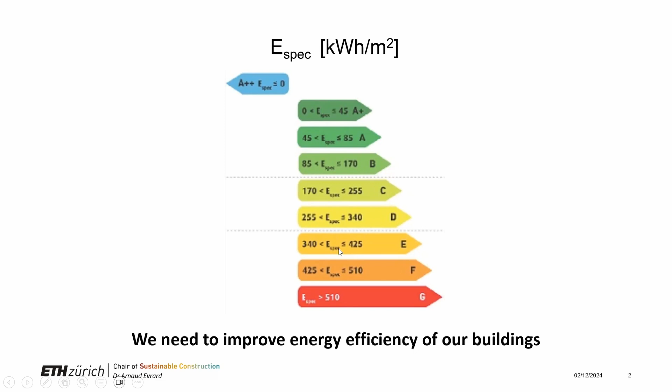Since I started to work maybe 20 or a little more years ago, I always keep on seeing this graphic with the perspective on how we should evolve in terms of carbon emission. This graphic keeps on going up actually, and the scenarios are always hoping that we will get better. Now the aim is to decrease around 50% of our emissions by 2030, maybe to go to zero emission in 2050. It's very, very, very ambitious, but we do have to try.

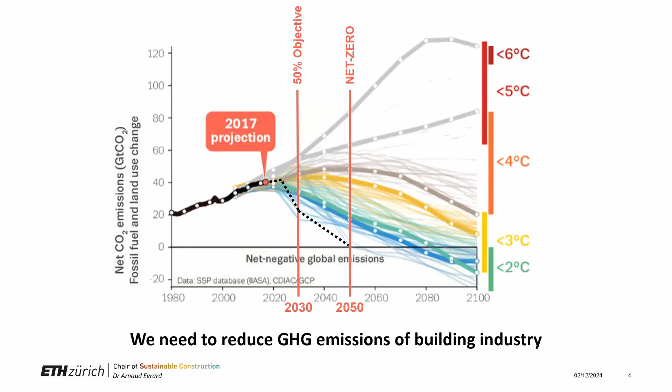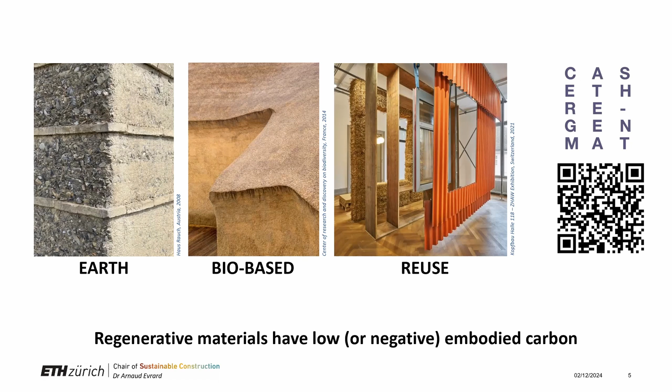I think that's why we should insulate, but we should always insulate with material with low carbon impact. That's why I want to focus here on those materials, and that's exactly this QR code linked to the teaching we're doing in Zurich, where we actually decided to talk about regenerative material, because they're not only good material with very low impact, but they also bring something positive. In this case, with insulation, we basically talk about bio-based material. I'll come back on this.

So to insulate existing buildings, we have many choices. We can put the insulation outside or inside. Sometimes there's space in the wall to fill in with insulation. Sometimes there's a wood structure and the rest has to be renovated, so we can fill the structure with insulation. Basically, we'd say when it's possible, when the aesthetic value is not important, insulating from outside is always better.

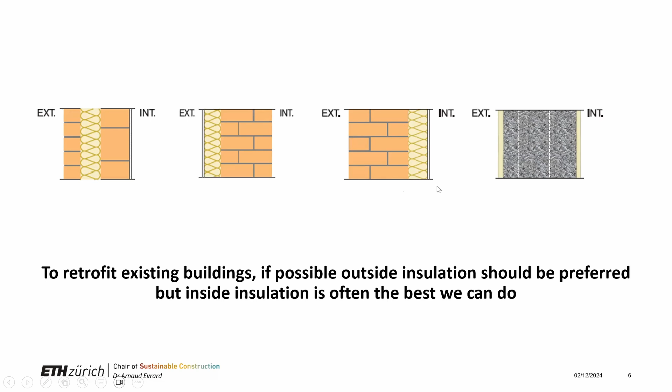But here we discuss focusing on inside insulation. That's what I would do, because actually in many cases that's the only thing we can do, the best we can do. But the problem is that it's not easy, and it makes a lot of building physics problems, or there are challenges in terms of building physics. So I'm basing this on work we did in Belgium, a 4-year research project on inside insulation on brick walls.

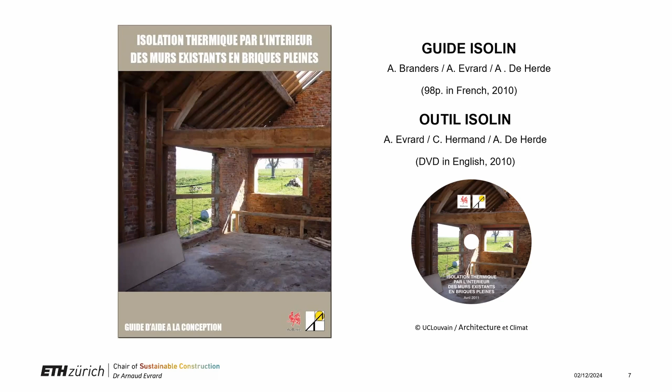I don't want to say I'm talking only about brick wall, but I think all what we did is actually interesting. So I took some graphs and illustrations from there to talk about this.

So inside insulation has a lot of advantages. As I said, you do it from inside, so most of the time it's the only thing possible because you can't put up a scaffold or change the specificities of the outside surface. Usually you don't need a permit, and you can phase the project. So it does have some advantages.

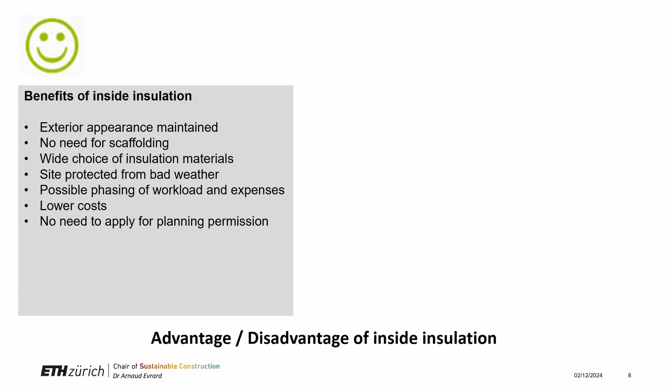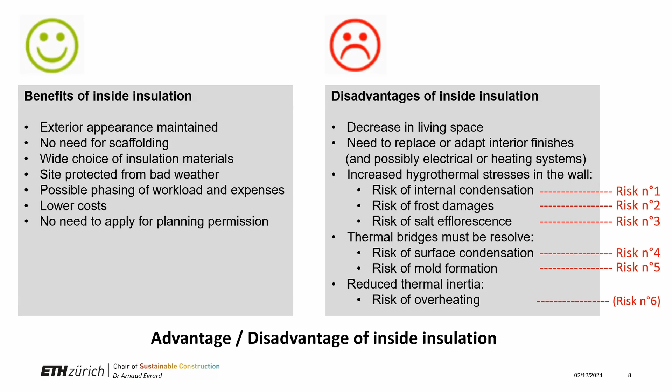But as you can see here, it also has a lot of risks or disadvantages. I will highlight these risks, what I wrote in red here, because I think that's what you should keep in mind when you design an internal insulation system. You have to think about all these problems, and there's quite some complexity, as I will try to show, but it's not impossible, and we do have the material to answer this.

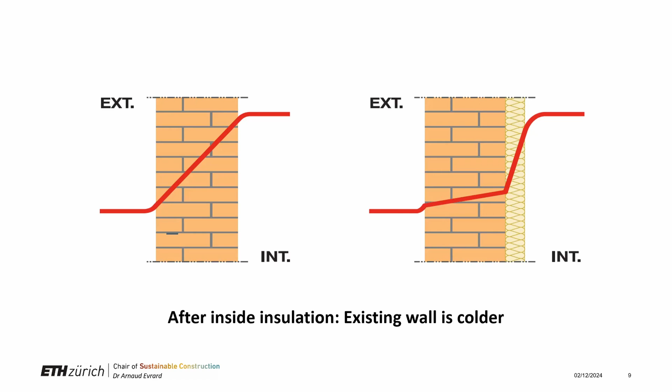So for those who have no idea, just to get the main idea: if you insulate your wall from inside, basically your wall afterwards will be colder. And that's what you should keep in mind, because that's where all the problems or issues are born.

So if you look at this graphic on the amount of humidity the air can hold depending on temperature, the Mollier diagram, you can see that if you have air at, let's say, 20 degrees, 50% humidity, which is an average for inside the ambience, as soon as this air comes in contact with a colder surface around 10 degrees, there will be condensation. It will be saturated, it will condensate.

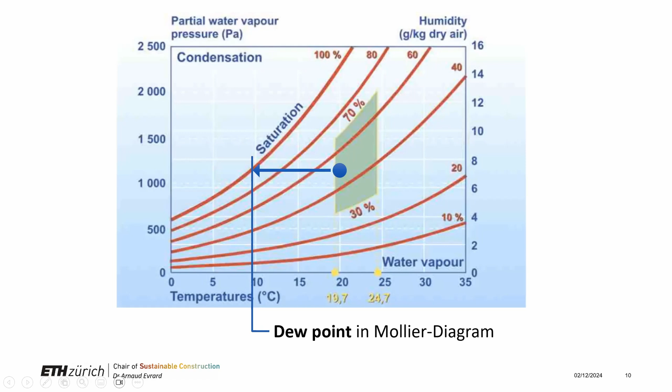This can happen in the wall, on the surface, and of course that's what we try to avoid, or at least try to manage. So the biggest risk is internal condensation.

As I said, you have your inside insulation, and your wall outside is colder. So if the vapor you produce inside, or the higher vapor pressure from inside, has the tendency to go through the insulation, if there's nothing made to break it or slow it down, it will most of the time condensate there, and that's a problem because you will have a source of humidity and you can have many other problems linked to this, with mold or whatever.

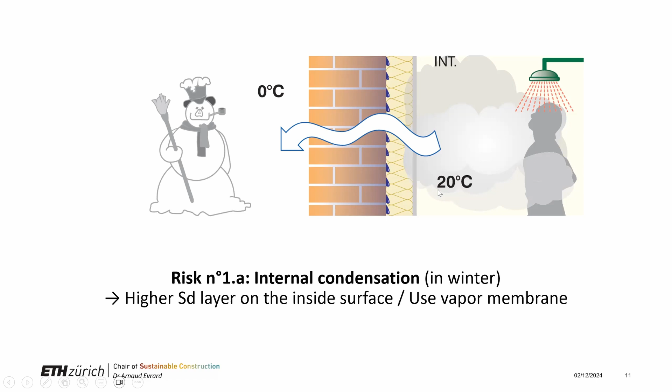So the solution would be to put a membrane on one side, or to have a layer with a higher SD value, so a higher break for vapor diffusion.

Second risk, which is not often thought about, is that in summer, the vapor transfer can turn around and go back to inside. If you put a membrane with a very high SD value on the inside to avoid the previous risk, then you may have the other risk that when the wall wants to dry out, it will be condensating on the inside surface. It sounds strange, but it does happen.

There's a measurement from the Fraunhofer Institute on this. So what you have to do is basically choose your membrane or layer inside with the right SD value, not always the highest. It has to be the right one.

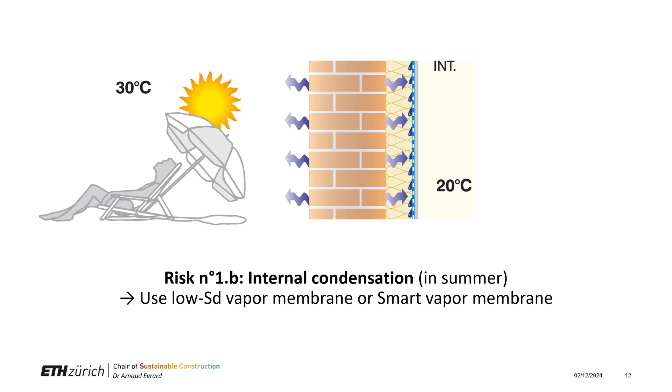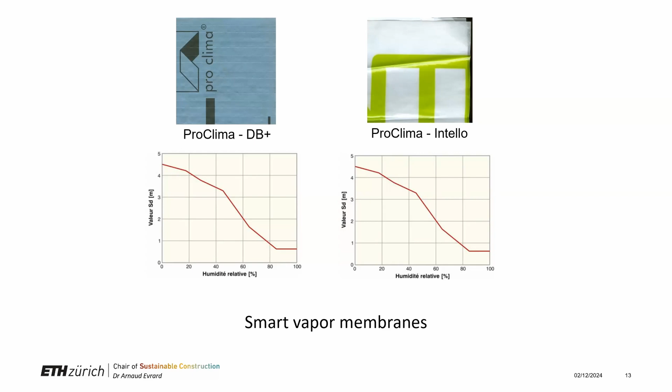For this, which is very good—I am not making any advertising here, there are other products—but basically the smart vapor membranes, like those from Proclima, are really interesting because they have a different SD value, so a different way to break the vapor transfer depending on the season. In winter, the air is a little drier, there will be more of a block to vapor transfer. And in summer, where it has to dry out, there will be an opening. So that's a very good choice, I think, to go with this kind of membrane, which is smart.

Another risk also linked with condensation is that you have to manage the air tightness, because as soon as you put a layer of insulation, if you don't manage where the air from inside is going, or eventually the air from outside, you may have a lot of condensation also, because the air transports a lot of vapor. So this has to be managed also because of the thermal performance.

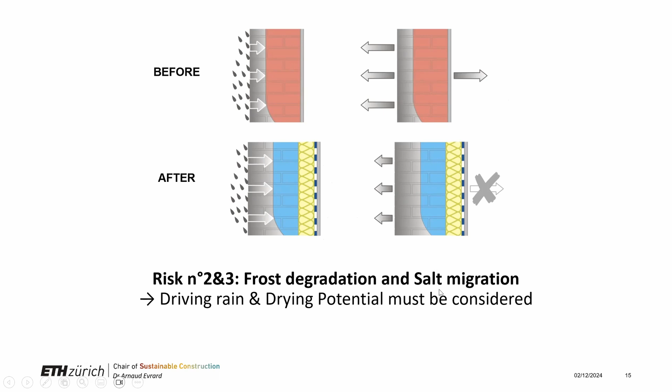So another type of risk is that the wall will become more cold and more wet. Before insulation, when it gets wet, it's warmer so it can dry faster and dry from both sides. If it's insulated inside and the inside layer isn't very open to vapor, it's harder to evaporate the water, and it can only dry from one side. So these two things, more wet and more cold, can bring frost degradation problems that weren't there before, and salt migration can appear or get worse. That's a very classic problem with inside insulation on some types of masonry.

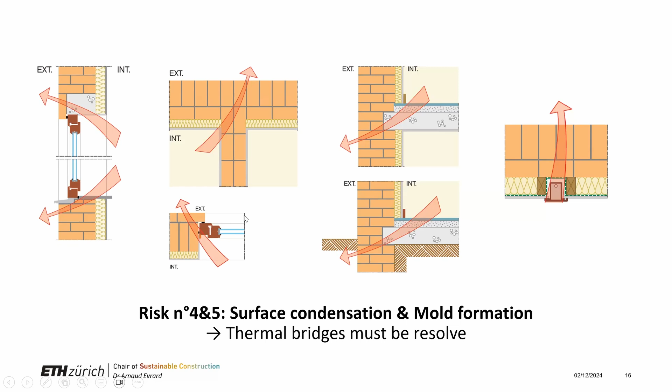Of course, if you insulate from inside, you also have to manage the thermal bridge. This is obvious but important to say. As soon as you have areas where the insulation level is not as high, you may have a very cold surface where there could be condensation, on the ceiling or around the window. There will be condensation because the vapor, unable to go elsewhere, will go there and condensate. So you may have more problems than before, and the wall is colder, as I said. So that's all the risk you have to face, and you have to combine them.

The problem is that we usually, still, though it's evolving, use a very simple model, the Glaser model, where you just give the thickness, the lambda value or thermal conductivity, and vapor permeability. With this, in a static way, it will say there will be condensation or not - basically if the vapor pressure is higher than the saturation vapor pressure, it will condensate. So the software will say it doesn't work. As soon as you have inside insulation, you can try it, and most of the time it doesn't work. So most of the time this type of model will tell you it's not working, and then you put a membrane in front to avoid this.

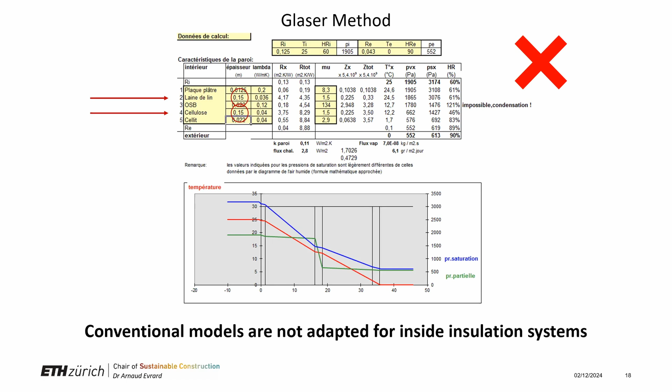But as I said, then you can provoke some summer condensation. So these models are actually static models, and they are limited because they don't consider how the moisture can redistribute and how it evolves dynamically over time. Maybe it's not happening so often, or if it is, maybe there's time to redistribute and re-evaporate. So these models are actually not fitting, and we need some more evolved models.

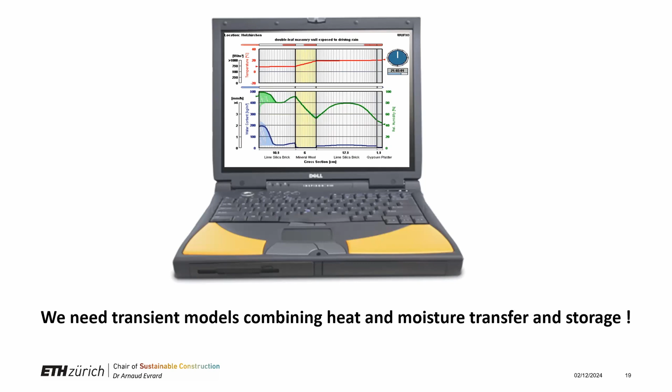So not everyone has to do a WUFI simulation or equivalent. There's MOIST, there are different software, but the best would actually be to make a transient simulation considering all the transfers - a dynamic transfer in terms of temperature and humidity, vapor and liquid water. So it sounds complex like this. I'll try to wrap it around.

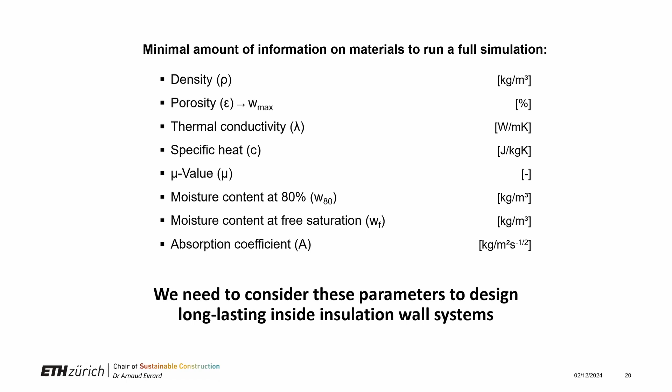The thing is, to do this simulation we need a lot of parameters. Usually you just know the density, thermal conductivity, and mu value of the material, not much more. In this case, you would absolutely need all the other parameters too - the specific heat of each material, and the absorption curve. Basically you can have different values to draw the absorption curve, and the absorption coefficient is actually the liquid transfer. You need the absorption value, but you also need the redistribution value. So you need a lot of parameters from each material you're using. I engage all the material producers to measure this. Of course it has a cost, but this helps to simulate and use the material in the right place.

So it sounds complex, but the good news is that the models are there and we can use them. The material parameters, if they don't already exist, can be measured, or at least assessed - you can always think about what the parameter would be by comparing to an equivalent material. So it's possible to assess these parameters.

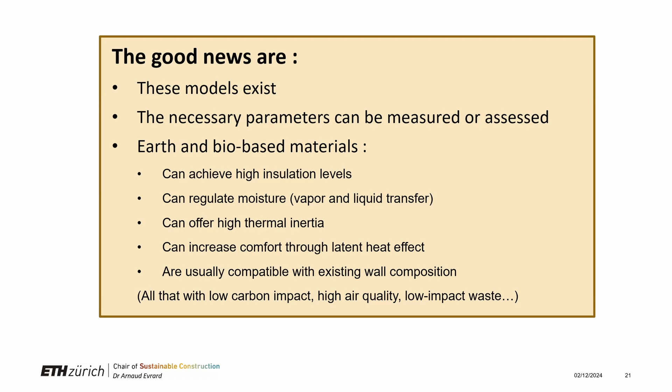And the other very good news, when we want to insulate with natural material, is that these materials have some specificities in terms of hygroscopy. They are able to absorb water and release water, and they can still be good insulation. So they actually have all the parameters, all the properties you need to make inside insulations. My way to think is that natural materials are actually more appropriate on the inside than classical or synthetic insulation materials. So for me, it's good news - it means we can use some of these materials.

I can't go through all the ways to do this, so I'll just try to structure it into 4 different structural or constructive systems. You may have some panels that are a little more rigid, could be wood fibers or hemp fibers, and you just put the panel, and on the panel you can plaster. Then there's a system where the insulation is softer, and you want to blow in this insulation with cellulose or straw - you blow it into a wood structure, and on top you put an earth board or wood board, or whatever provides a trigger for the plastering.

You have this insulation which is kind of a light mortar, like lime hemp or earth hemp or light earth mix, and then you plaster them. Or you have any kind of insulation that you could actually put behind another layer of brick or masonry.

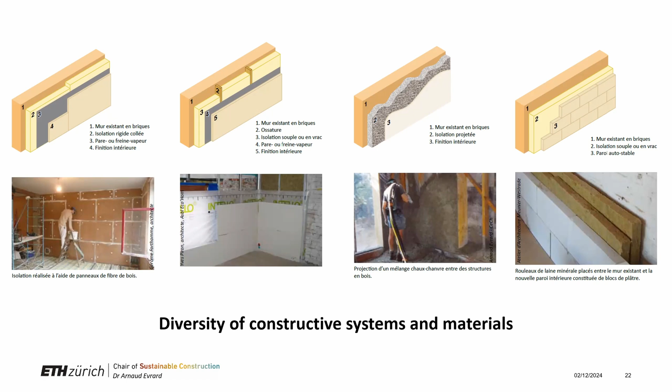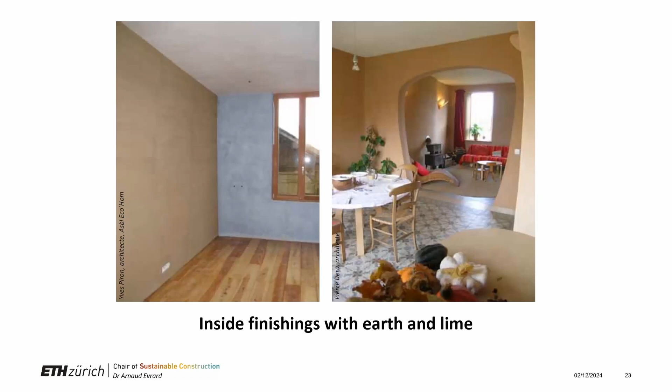So all are possible with different materials, and of course the aim is to have a very nice inside environment. Natural materials are very interesting to make a comfortable environment, but it doesn't give any limit on the quality of the insulation that's behind.

I did my PhD on lime hemp material, so I always like to talk about it. Now I'm developing, or I'm very curious about the development of earth hemp products that are coming, because they have an even lower carbon impact but relatively the same properties.

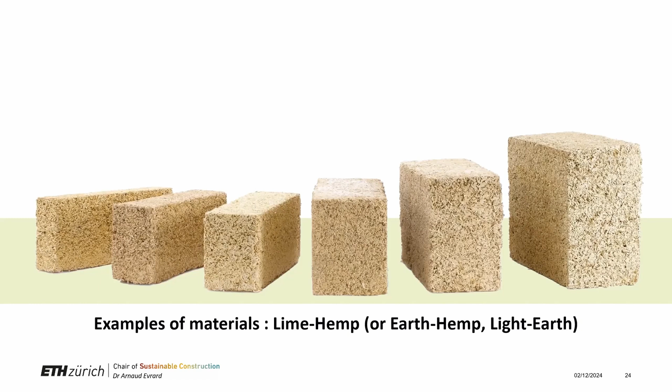And why are they so interesting for inside insulation is because they are very open to vapor. They are able to absorb a lot of humidity before any properties change. And they have this capillary action where liquid water, if there is any, will be very fast redistributed and re-evaporated somewhere else.

So I think these materials are very well adapted for inside insulation. I do like straw insulation a lot. Maybe for inside insulation it doesn't fit as well as straw bale, because it's usually too thick, and one of the big problems of inside insulation takes space from the inside. So you may not want to use a straw bale, but there are some panels, straw-based panels, or these Isostroh straw materials that you blow into the wall.

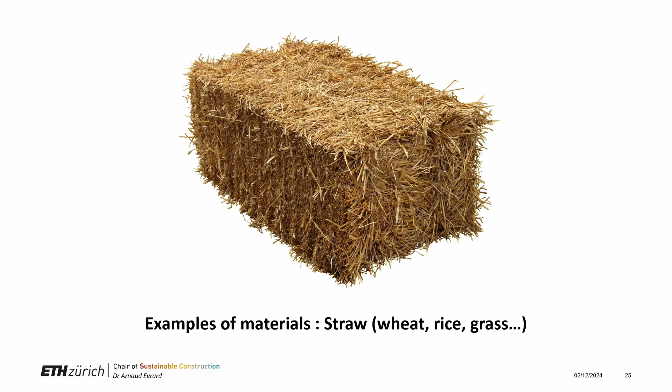So they have very low impact on energy, very low carbon content. Oops, sorry.

I'm bad with the time, so I'll go a little through this. I don't want to go through all the materials. I think Natureplus is a very good place to have a panel of materials and also to get a value on how good they are. There are so many materials possible that you can't say you didn't find any.

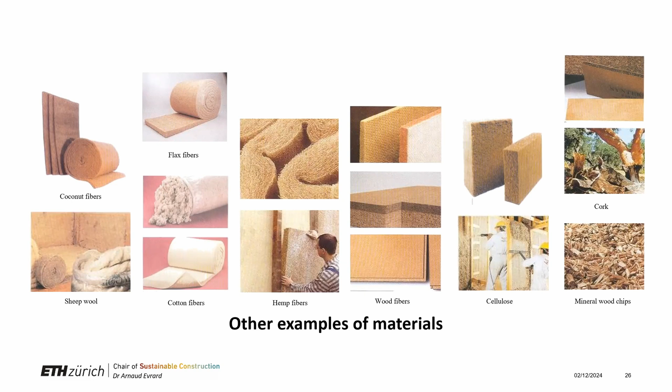There is some. I wanted to finish by giving a short example. Maybe we can talk about this more in the discussion and come back on some of those slides. The idea is that the building physics behind this is quite complex and it depends on many aspects.

Is there already a frost problem? Is there already a salt problem? If not, maybe they can come, but at least you have to know, and different orientations are very different. So you have to observe the existing building before making any choices.

And then you try out a solution depending on the budget, the client, and the project. And then you have to test this solution and see how good it is. Eventually you go back a step and do it again until your simulations are good.

Afterwards, it's not finished. The best is actually to follow up on the implementation, because the way you build it—if you're not good with airtightness or if you didn't put your vapor barrier the right way—could be a big problem. So you have to be on the building site and check how it's done. And eventually, the best would also be at the end to control how well it's working and to have some measurements.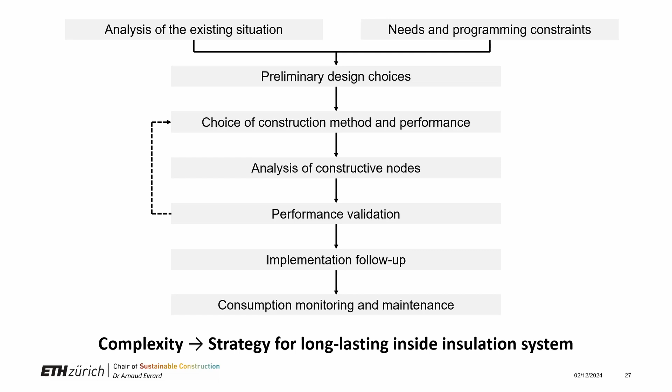So this case study is a very old heritage building where the architect contacted us to see if they could insulate this building with cellulose.

It's a stone wall, and they want to make a house of it. So I'll just show a little strategy of how we approached the problem. Analyzing the existing material is the main thing, as I said, looking at different places where the detail will be different because the wall was not totally straight.

And we developed different kinds of details, and for each of them we did this simulation. Of course, it's not a brick wall, it's a stone construction, and we had to choose the stone. So we took from the database different kinds of stone and tried to see what would be the right parameter for this wall.

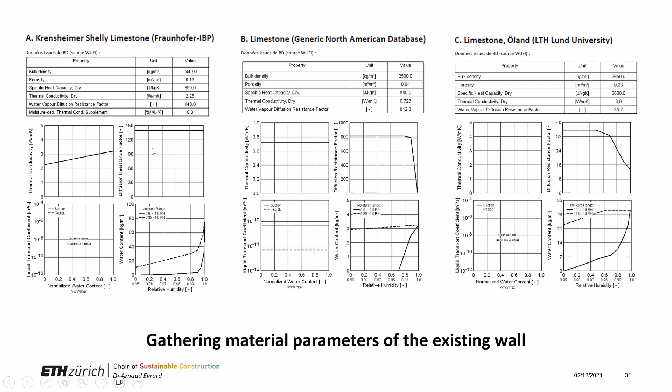The liquid transfer is very important, even if it's often neglected. I'll show a lot of graphics, but basically you always have to look that the moisture of the wall goes down with the year, or at least stays stable, and should not go too high. If you see a curve like this one where the moisture content of the wall goes up, it's not good, because eventually the wall will be full of water. So depending on the vapor barrier and the parameters of the material you choose, you look at how it's going to work in the long term.

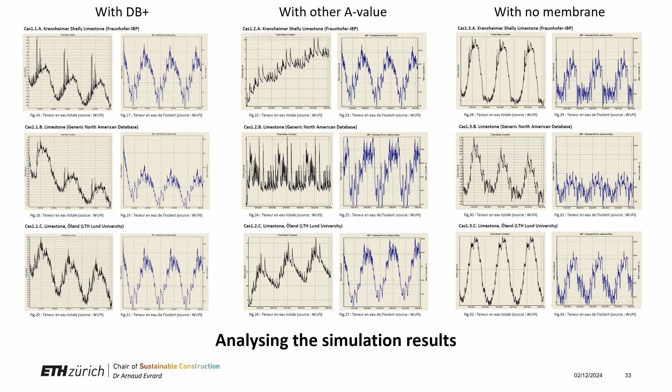Of course, you have to be careful of some details, like where the beams go into the walls, etc. Maybe a last thing that was a surprise for me is that the orientation of the wall and how much driving rain hits the wall was one of the main parameters.

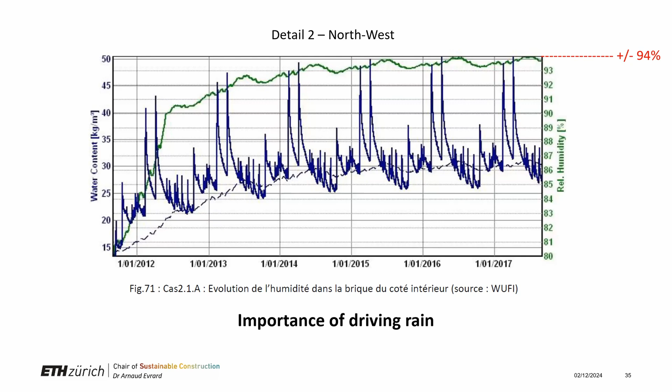If the wall was painted, it could not dry really well, so we had some accumulation problems. If there's no rain, of course, you don't have the problem, but as soon as you have rain, you need a layer that regulates the liquid transfer, lowering it, while still not lowering the vapor transfer. So the wall should be open to vapor, but closed to water. That's basically what this graph shows.

To conclude, just like you can build with almost any material, you can build with straw. Maybe what you should remember from the story of the three little pigs is that you should not ask a pig to build your house. It's in the details of how you build, how you manage the air tightness, how you manage the vapor tightness, and how you manage the drying potential of the wall. The wall should be able to dry if it gets wet.

Okay, that was a challenge. Sorry if I went a little over time. No, but you're fine, 20 minutes, you're good on time. And we still have another 10 minutes for discussion.

So thank you, Arnaud, for this very complex and of course difficult topic. I know, and we always know that this is something which can drive you mad if you have to think about insulation inside and so on.

Before we open for questions, I would have one question. The material issue is one aspect—for indoor insulation, natural materials would be a better choice than any plastic or insulation made out of fossil fuels. But another question that comes up is about technical solutions like ventilation. What is your opinion on that? Is it helpful, or does it hinder low-tech building approaches?

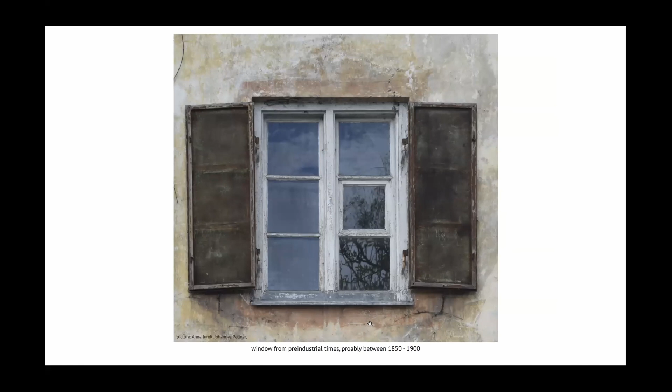The first example is about the windows of a typical farmhouse in Upper Bavaria. This is a listed building from the 19th century that stood empty for a long time, which helped keep its originality. While the other facades in the row of houses on both sides of the street were renovated, this house was not touched, so the windows and doors from the 19th century stayed preserved. Here you can see a window from pre-industrial times.

The owners planned to restore the house but were unsure how contemporary living comfort could be created, especially concerned about the windows. In order to show it was possible to enhance the windows, I proposed to build a sample.

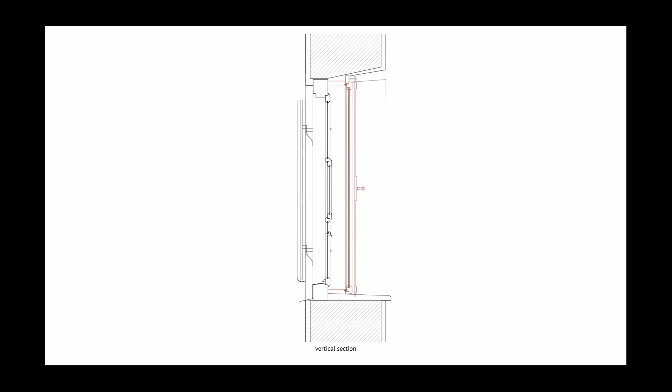The proposed solution was quite simple: we introduced a second glazing behind the historical window on the inside. The two windows, the new and the old one, form a box-type window together, which gives considerably better protection against cold and, importantly, sound. Here's the drawing - this is the old window and here's the new layer, and here in vertical section in detail. This picture shows the window construction, and here the inner frame has just been assembled.

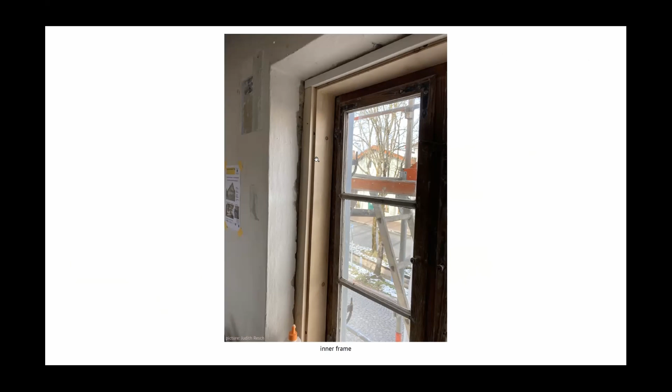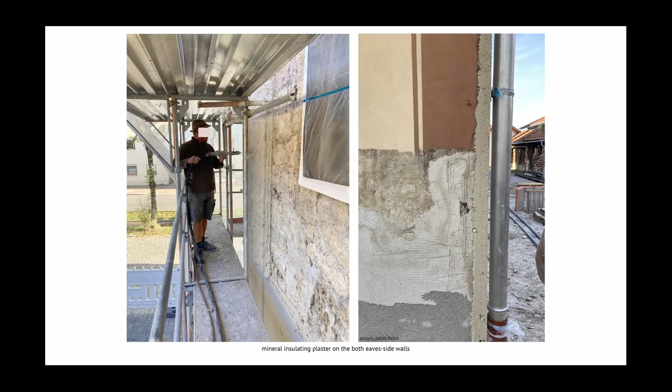This links to the question we were just discussing. We had two different ways to treat the inner reveals because of the facade. The Monument Protection Authority required historical plaster at the gable facade, so we decided to treat the facades differently. At the north facade, we put wall heating from copper pipes into the reveal, because we had to restore the gable wall with the most parts of historical plaster. We put new mineral insulating plaster on both eave sides. That was the agreement with the authorities.

Our concept of the box-type window was agreed during the planning phase with a building physics consultant. Here you can see the technical specs - the U value is now much better, though not as good as the U value of the masonry. And you can see the protection from noise is also much better.

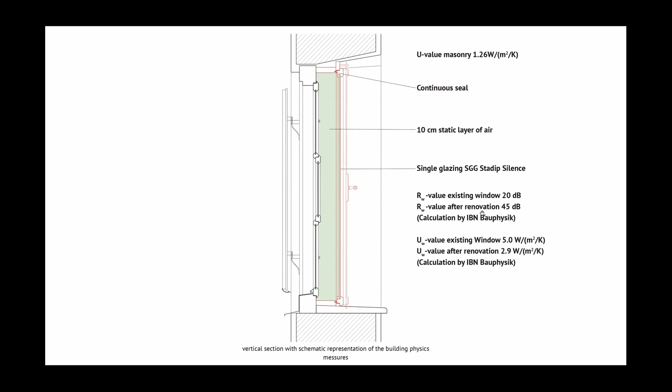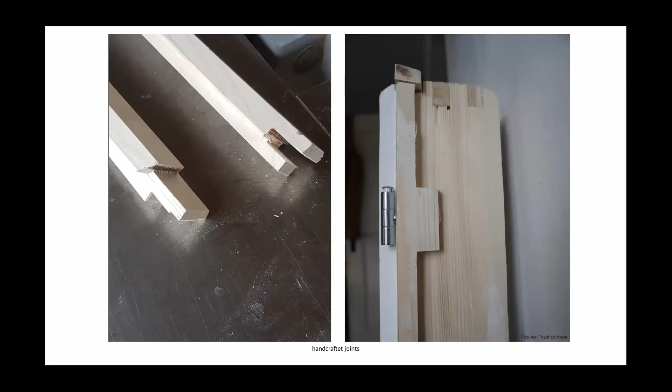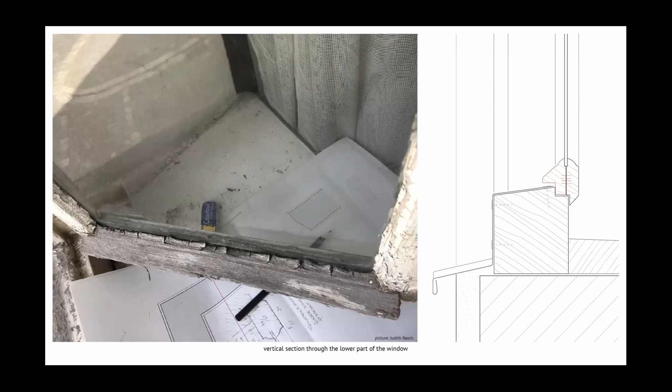The new parts of the window were made in a craftsmanship way, in the manner of the historical windows. What was impressive is that most of the historical windows were still functional - the surface was damaged, and some parts of the window frames were damaged, so we replaced them, as you can see on the drawing, for example here the replacement of wooden glazing bars. These new parts should be made out of old wood, for example from old window parts, because practice has shown that wood from old window parts is more durable.

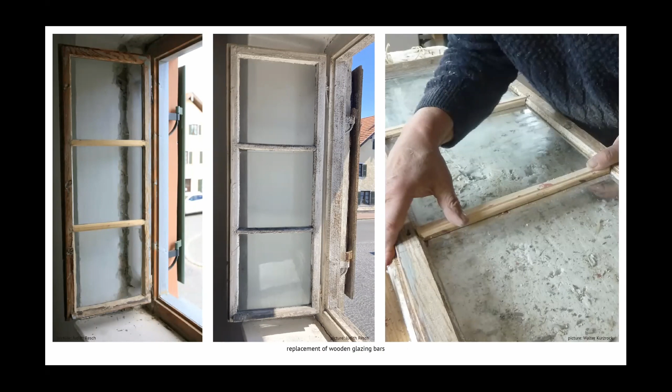The paint of the window was removed in a thermomechanical way, and the surfaces were coated with a linseed oil-based paint system. This method has been tried and tested for centuries. It is natural and very durable because it penetrates into the wood pores and remains elastic. But it takes days for it to dry.

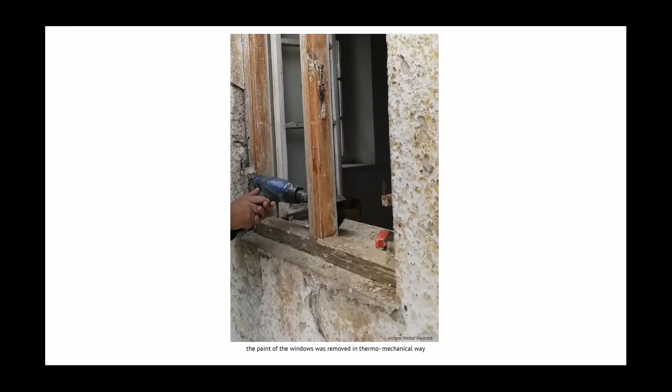The preserved windows critically define the appearance of the renovated building. And while the owners initially were reluctant to agree to the rework of the windows, they are now super happy about the result and proud about the method of restoring the building.

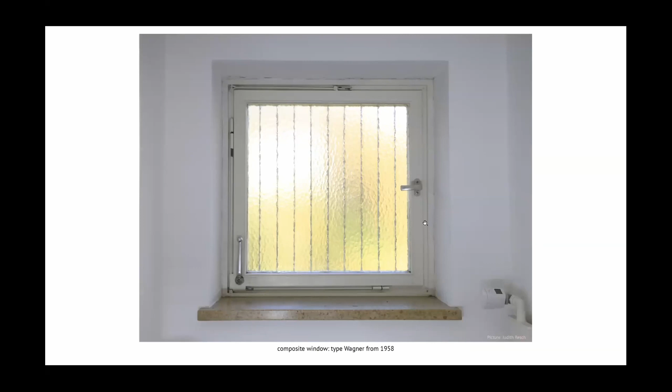Let's look at the next example. So what about this window? It's a composite window of the 50s, and the insulation is not up to date.

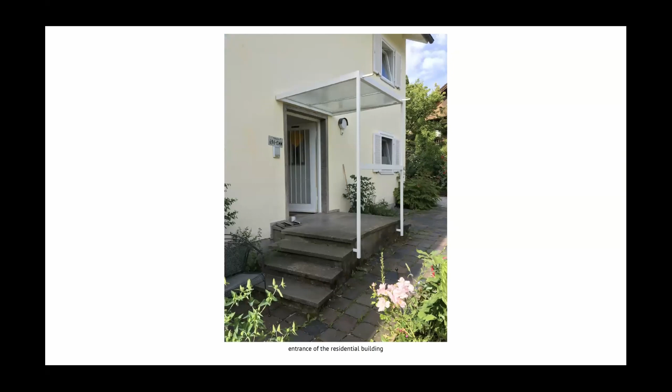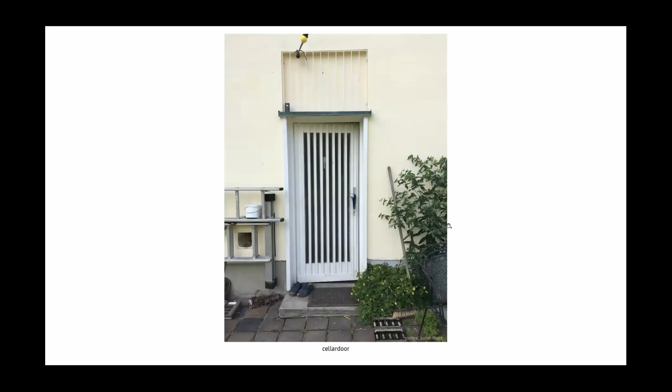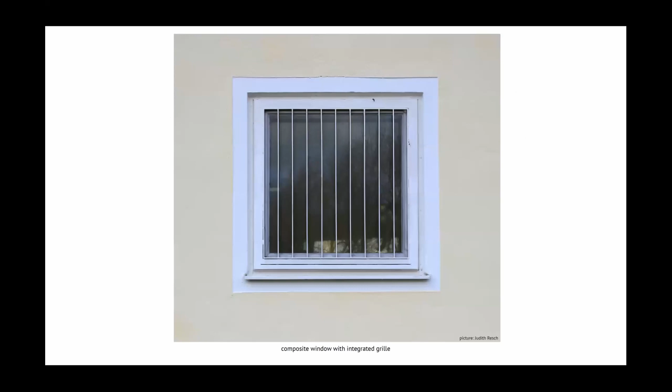Again, the north facade, look at the windows. They are fitted flush with the facade, with a surrounding shadow joint of constant width of the wall opening. And here the slim grilles of the ground floor windows, which are also integrated flush into the frames. And this is an original drawing of the window details that shows that it's very well considered.

And here you can see the elevation and vertical section of this window. I was enchanted by the design of this house. On the flip side, the heat transfer of these nicely designed windows is immense.

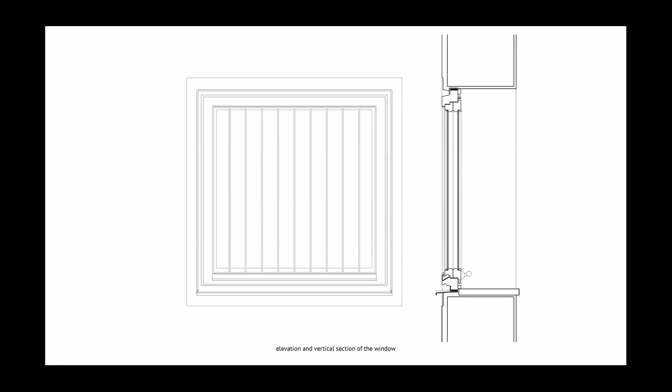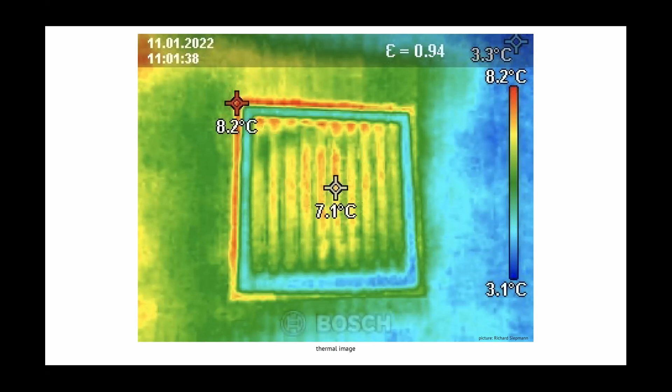So here you can see the thermal image of the facade. The weak points are obviously the glazing and the reveal. The heat loss at the reveal is caused by a steel frame where the windows are attached. So this is the steel frame, and this is the vertical section in detail.

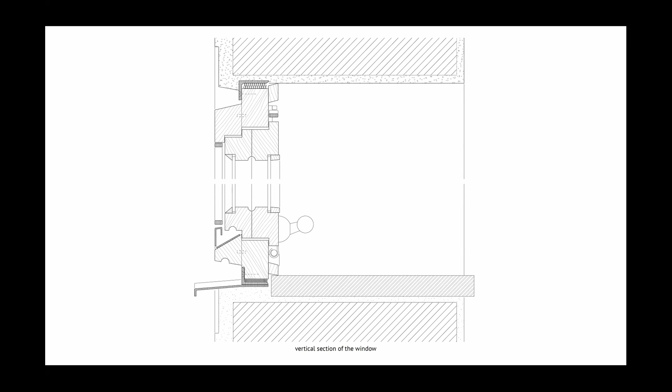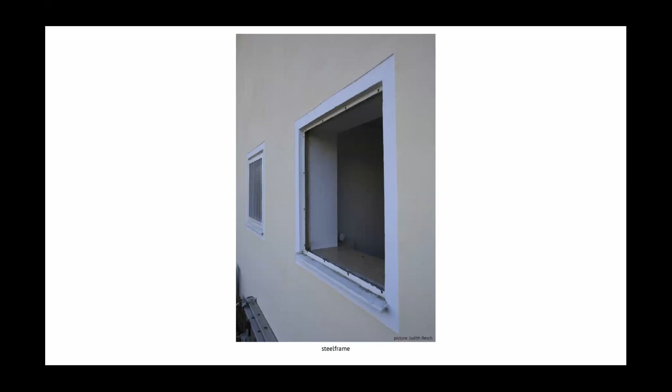But the steel frame here also brings about an advantage. The window can be removed easily without damaging the plaster. So to see if it works and how it looks inside, we removed one window, as you can see here. Here's the steel frame, in detail. The removed window.

Now knowing the situation, we developed a concept for improving the windows and the reveal. Here is our plan. So we replaced the second glazing with a new one, a vacuum glazing, which is much more efficient. We made grooves routed at an angle into the rebate to fix seals. And we planned interior insulation for the interior reveals.

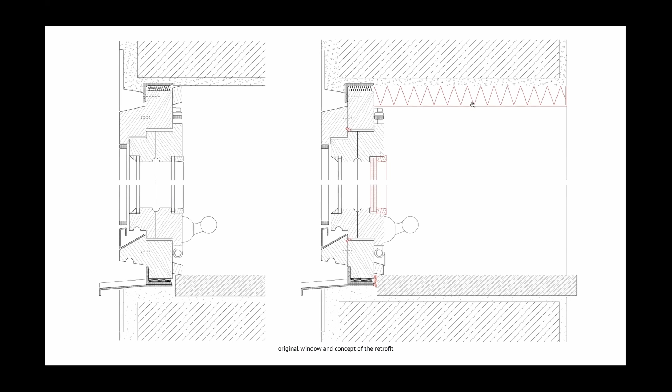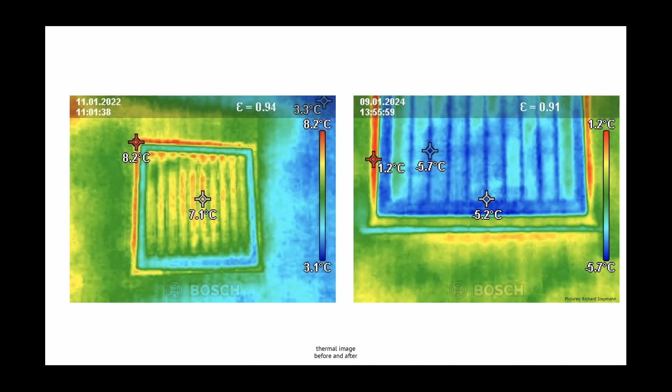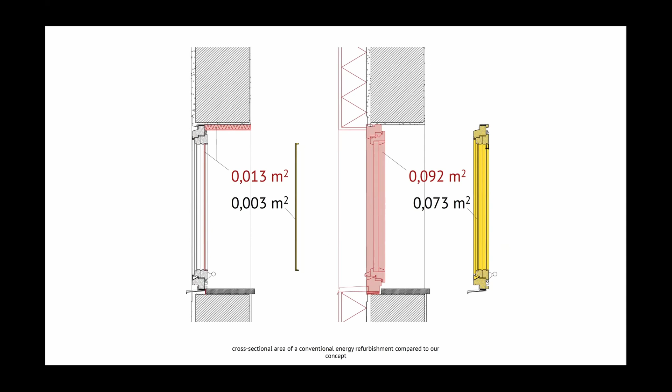So now you might argue that these examples are quite peculiar and not mainstream architectural projects. In most retrofitting of building shells, windows will be replaced. Then the question comes down to the material of the new windows, wooden windows versus plastic windows. For this debate, I want to give you some arguments why wooden windows are more sustainable.

As we just could see, wood is easy to work by hand and can be simply maintained in the long term by replacing any damaged parts. And the material's physical properties of wood, such as thermal insulation, load-bearing capacity, temperature-induced dimensional changes, and electrostatic charging or discharging, are much more favorable than other materials.

In case of fire, wood is considerably more resilient than, for example, plastic, because wood burns more slowly, emits no highly toxic dioxins, and does not melt. And of course, wood is not a special waste.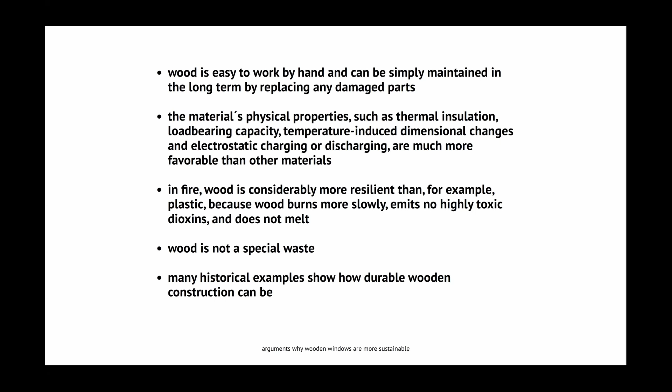Many historical examples show how durable wooden construction can be. So now I want to go on with an example where the challenge of developing a new window for an existing building was solved in an exemplary manner.

This window was developed in cooperation between architect and joiner, building upon the tradition of wood craftsmanship. They aimed to meet high standards of heat insulation. The original windows of this former farm building were not preserved, and that's why the architect wanted to design new windows. The frames should be as slim as those of historical windows, but accommodate a modern triple glazing.

And here's the result of the project. They designed a window as precise and fine as furniture. Let me show you the construction.

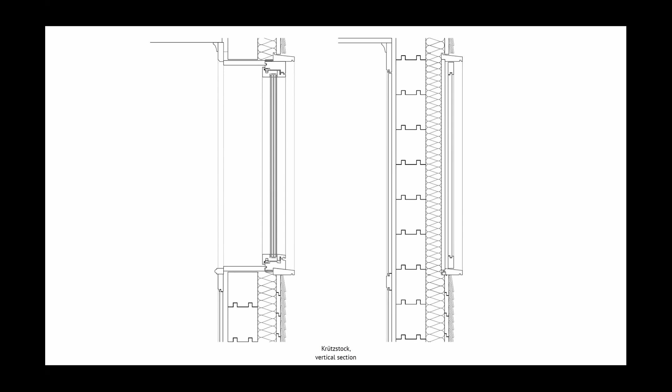This is the vertical section. You can see the historical wooden wall with the outer insulation, with a new slim window, with shutters enclosed by a frame. And here's the explanation why the frame is so slim. So the fitting of the window and the glazing is arranged in two different levels, opposite to conventional design.

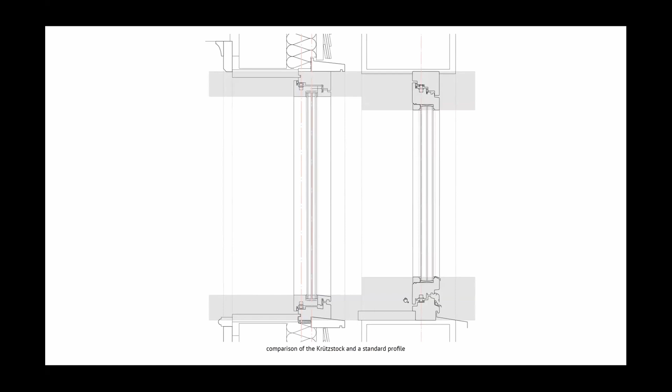Here you can see that the weather bar and the other lower parts of the construction are made in oak, while the other parts here are made of spruce. And here you can see it in detail. These are the oak elements, and this is in spruce wood.

And it is even possible to replace some parts of the construction. For example, here behind the seal, there is a screw that can be removed easily to attach, for example, a new weather bar.

Yeah, so my last example is... right? I don't know, I can go on.

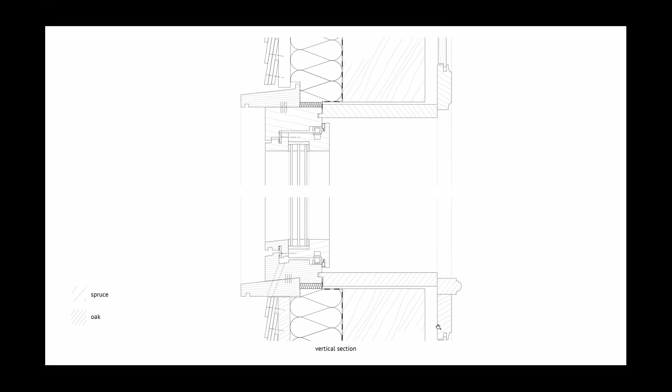My last example is traditional and simple and modern at the same time. The house was built comparatively recently, and it is used as a presbytery. And the windows are an integral element of the architecture.

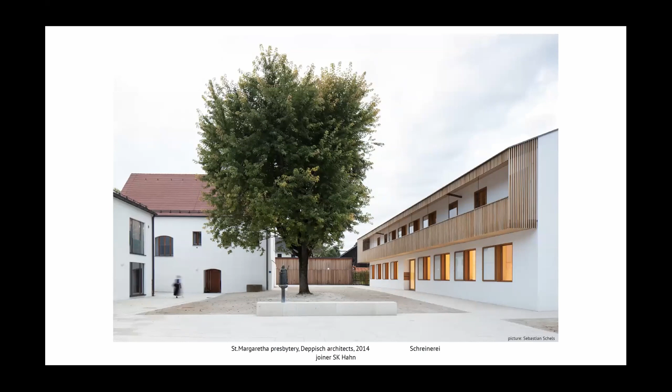They are also box type windows, like traditional winter windows, which is also typical for our region here in Upper Bavaria, and they have outward opening casements. This is possible because of the wide roof overhangs and balconies that protect them effectively from driving rain.

In warm weather, building users need windows that are simple to open. So this is the summer version of the windows. In winter, both casements are closed, but there are variations.

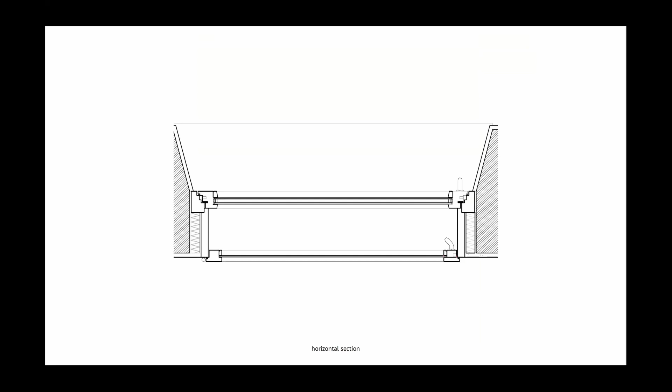Here you can see both casements in a horizontal section. It's a box type window as you know it, but look at this vertical section. If both casements are closed in winter, there is a controlled amount of fresh air coming through. In between the glazing, the air becomes warmer and flows into the house.

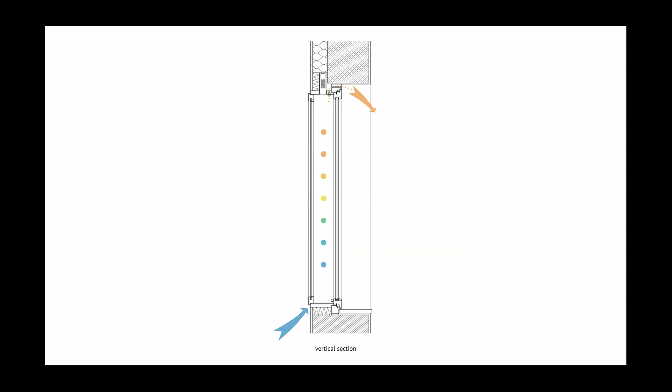So, how does it work? Let's have a look at the details. At the lower part of the outer casement, the seal is missing. So this little gap is the reason why the air can flow between the glazing.

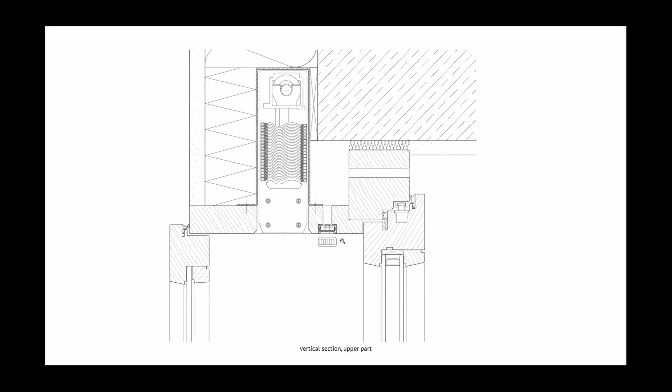At the upper part, there is a perforation where the air can get into the house. But you can also close it so that there's no air coming into the house. Here you can see it, and here inside.

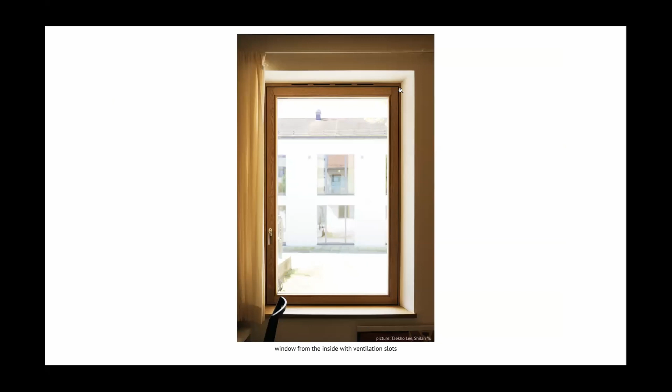Air changes can also be controlled and regulated by an additional mechanical exhaust air system. The stale, moisture-laden air is extracted from the area at the back of the building, for example, from the WCs. Fresh outdoor air streams in to replace it, because extracting air from the building reduces the indoor air pressure. For this to work requires free passage of air through all rooms, which is provided through adequately dimensioned gaps at the doors.

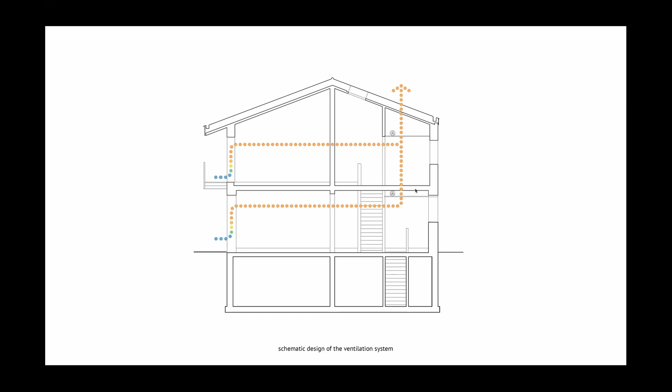So the window is a part of the air change in the building. The different opening variations of the inner and outer casements allow the ventilation of the modern box-type window to be precisely controlled while providing good thermal insulation. And the components, look here, are quite simple. So due to this intelligent, aesthetic, and simple design, this house gets by with little building technology.

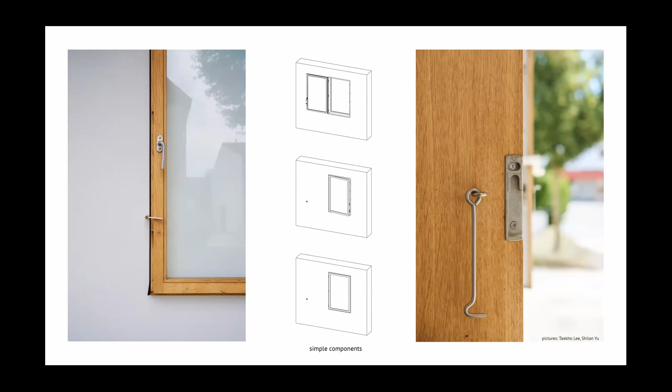So you can see that designing wooden windows means a lot of possibilities for the appearance and function of a building. If we want to create good architecture and take the aspect of sustainability seriously, we should not forget to put special attention on the design and construction of windows.